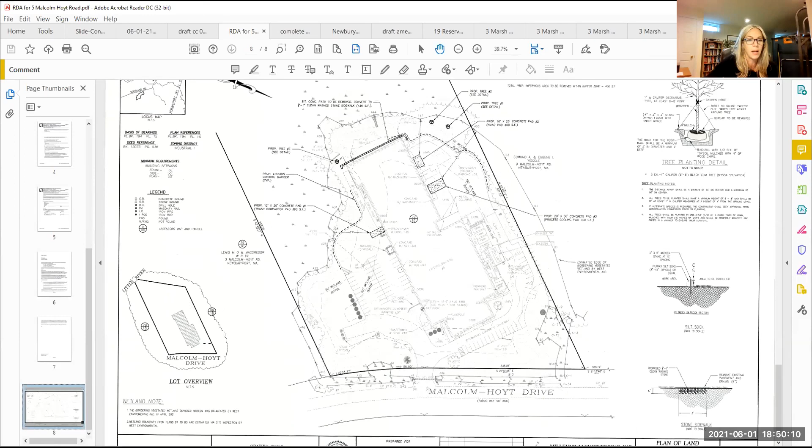Julie, I don't know how you want to do this, if you want to control the screen or if you want me to share my screen so I can pan around. Tell me where to zoom in. Tell me where you'd like me to go in the application, and I'm happy to have brought up the plan, and I will zoom in wherever you'd like.

Sure, okay. So the plan before you here is for the construction of 3 new concrete pads in areas that are subject to the Wetlands Protection Act as well as the Newburyport Wetlands Bylaw. The focus here is there's 2 on the right-hand side of the building as it's oriented in front of you now. One of them is located in the lawn area. Another is located further outside of the buffer - you can see the 100-foot buffer there. So that one is also in the lawn area, but outside of the buffer.

And then one additional one on the left-hand side of the building that is located entirely in a paved surface area. The engineers who were working on this provided a nice narrative describing what each pad was being used for, but essentially they're there to house additional equipment that would be placed on these pads. So once they are constructed and the equipment is placed, there'd be no further disturbance continuing from the ongoing use of them. However, there are impacts that will occur during the installation of those pads.

As a result, the engineers calculated the square footage of disturbance within the buffer zones, and as mitigation for that, they have proposed the installation of 3 native species tree plantings, as well as the removal of a concrete sidewalk along the top portion of the building, replacing it with a pervious gravel surface. It's a very basic plan, with the disturbances being mitigated through the reduction of impervious surface elsewhere within the buffer, and the minor impacts to lawn for that one pad within the buffer will be mitigated with the installation of the 3 new tree species on the site.

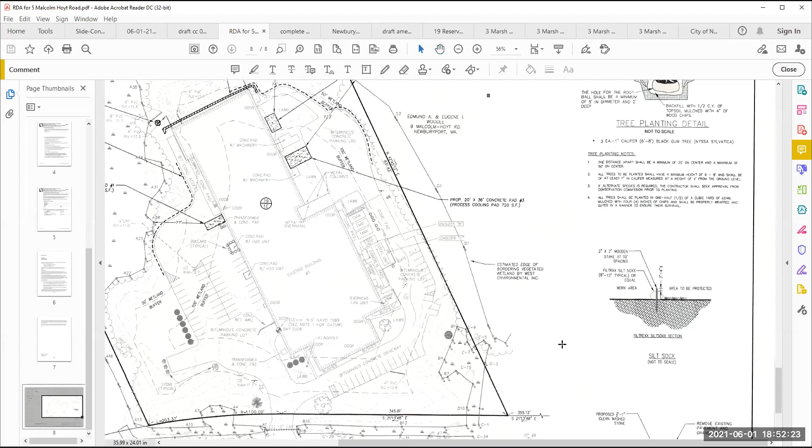We've proposed the use of Nyssa sylvatica as the tree in the corner of the plan. I believe there's a tree planting detail, and I'm not sure if they included an actual photo of the tree. We do have one we can provide the board, but it's one of the plants identified in accepted tree species lists for several municipalities, including Salisbury, Rowley, Amesbury, and I believe Newburyport, as acceptable outside of the wetland but within a wetland buffer environment.

Straightforward, I won't talk your ear off. If the commission has any questions, I'd be happy to answer them. Anybody? That looks pretty good. Straightforward, good to me.

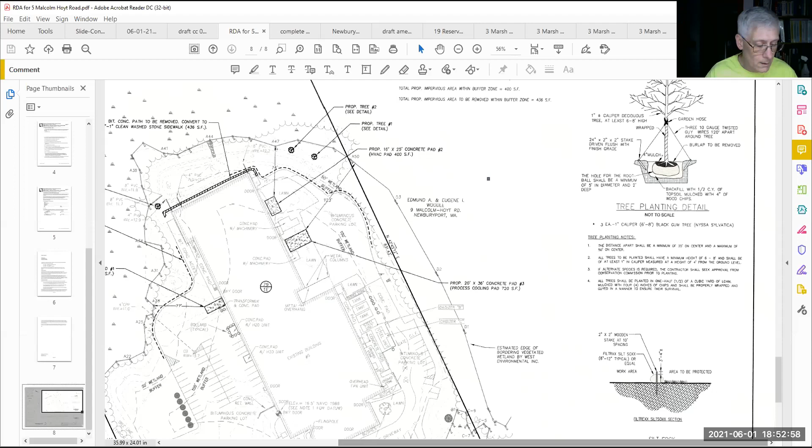Make a motion for a -3 determination. Second. The conditions being the trees and the impervious surface change. Okay, we have a second.

So roll call: Paul Healy, yes. Steve Moore, yes. David Vine, yes. Ron DeCola, yes. Carol Wagon, yes. I vote yes. All right, thank you. Thanks, Matt.

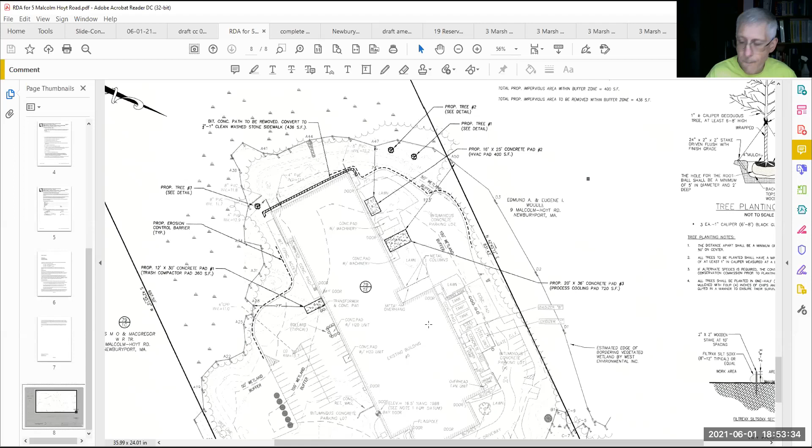All right, next item is Louisa Tanner and John Watkins, 260 Northern Boulevard, request for determination.

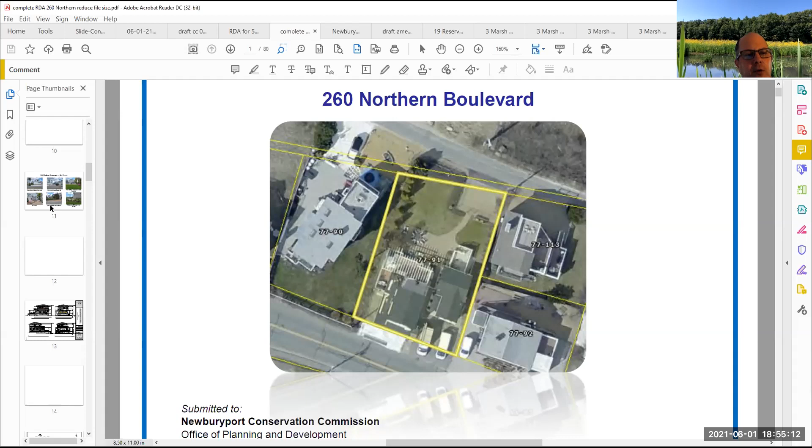Yeah, so it's mapped within the AO zone. We did, I think, provide the flood map and all that. So you can kind of see the site has some paved drive, a bunch of pavers, it's lawn. It's certainly the whole site is something you wouldn't allow today, but it's an existing structure, and actually there are 2 homes on the property.

What is proposed, on the house that you see there, is a large renovation, second floor on top of the first, and as part of that, reconfiguring the entryways, which is the only work really happening on the ground.

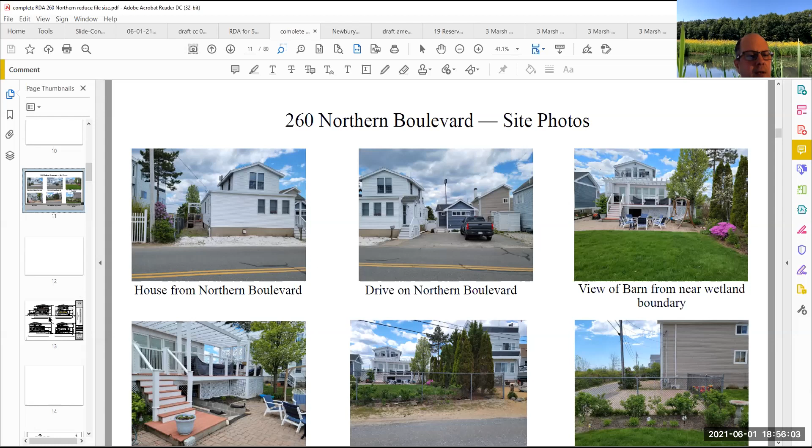Maybe go down to the site plan, or actually, if you go to those architectural elevation views. Yeah, so you can see the second floor gets expanded, and if you can see the deck in the upper left, that deck on the left-hand side that's tan, the area open underneath, basically that's a reconfigured entryway that's smaller than what's on the ground right now. And then in your upper right, you can see the entryway on the right-hand side. I believe that's the other area being redone.

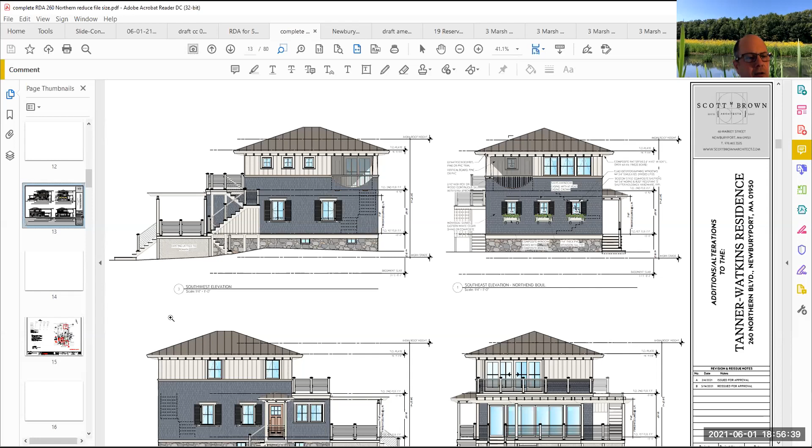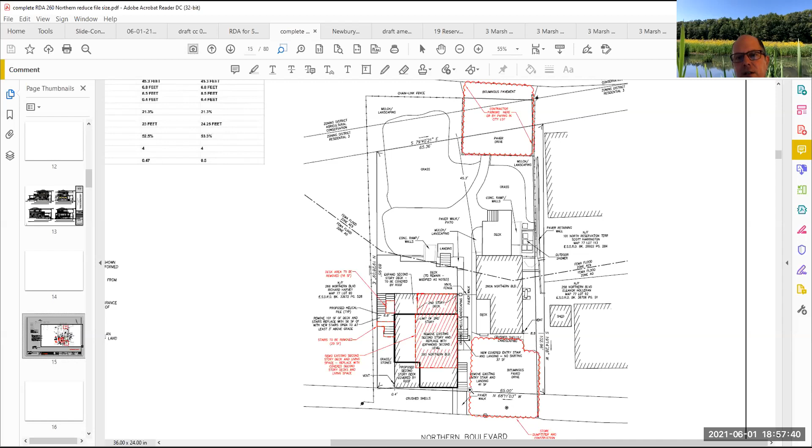Given the extent of the renovations, we also provided you with an extensive packet related to the substantial improvement rules. So I guess with that, I'd be happy to answer any questions. And if you want more information about the substantial improvement stuff, Olympia Bowker is here, who can address that package. She helped put that whole thing together.

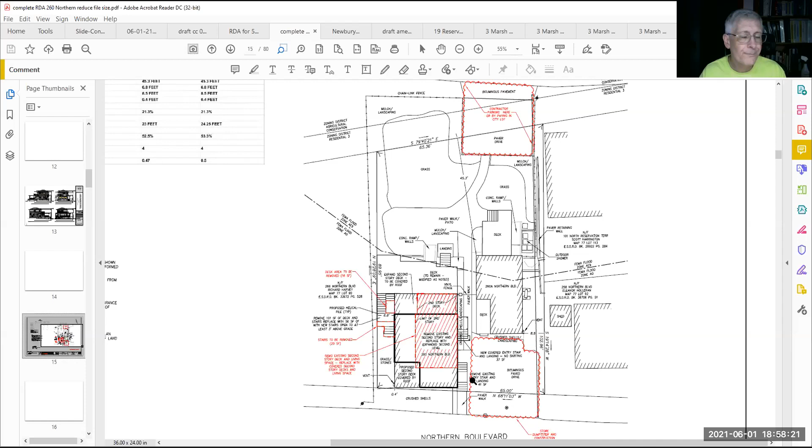Yeah, I'm gonna need more info on the substantial improvement part, because this seems like a rather substantial improvement to me. Yeah, it's a lot of work, and I think why don't we maybe have Olympia walk you through the package, which is after the RDA.

So if you can go down, right, so right there is where the package begins. And Olympia, do you want to kind of walk through the substantial improvement information?

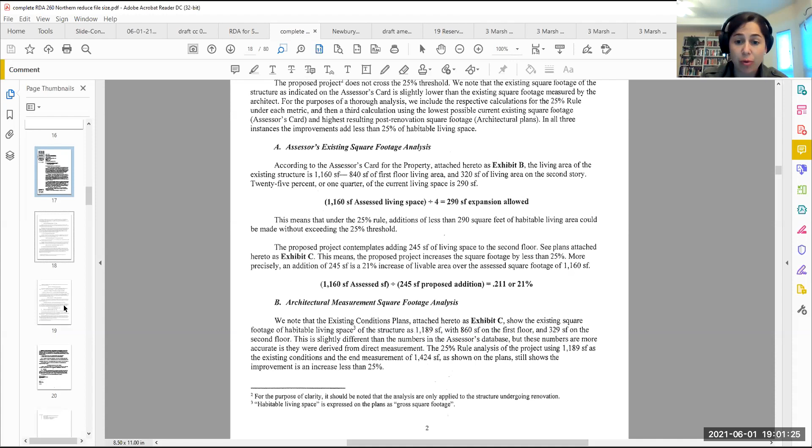What we have is a measured calculation of 1,189 existing square feet measured, divided by 4 gives us 297.25. So that would be the 25% increase allowed without violating that threshold. And again, only 245 square feet are being added.

Then we look to the second half of the substantial improvement analysis, which is the 50% rule. What the ordinance provides is that the term substantial improvement shall mean an improvement that increases the market value of the building by an amount equal to or greater than 50%. So there's two ways that an applicant can show this threshold is not exceeded. What we submitted is one of the provided forms of documentation under section 6B2A, I believe.

So what we provided is an assessment of the market value of the structure as is today. And then the appraiser looked at the proposed plans and calculated the market value of the structure once the renovations are completed. As you can see from the architecturals, the footprint is not expanding, it's just the second floor. And these additions, while they may seem like a lot, do not increase the existing value of the structure by 50%.

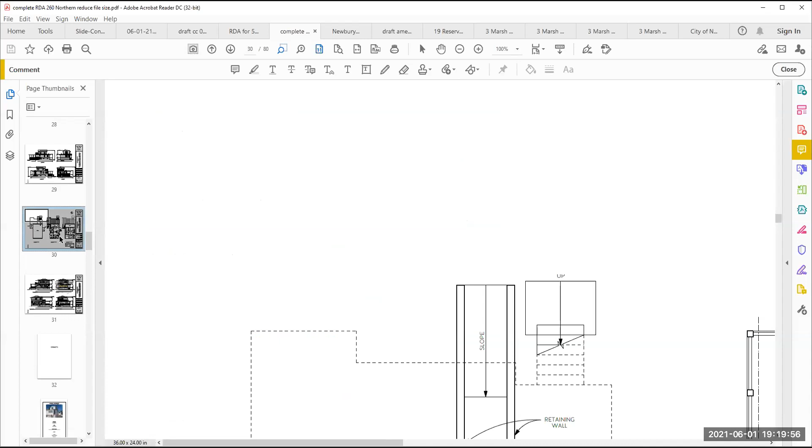The upstairs addition is basically a bathroom and a closet. We're both in our 60s, Jack's in his 70s. We have a spiral staircase and we wanted to remove that spiral staircase and add a different staircase in there so it's safer for all of us.

There is no bathroom there, and we need to go down the spiral staircase whenever we stay there. We're just trying to improve it. It's not any additional footage, and no outside area is going to be changed for conservation. It's basically just 240 feet on the second floor. That's it.

And we talk about the third bedroom. On the first floor we have a 1-bedroom, and all we were going to do is add a wall. We have 5 grandchildren, so we want to add a wall so the grandchildren could stay in one bedroom and the parents could stay in another. So basically it's really not adding another bedroom, it's just adding a wall.

And then changing the bathroom off the kitchen and putting it into the living room with the bathtub. We're big on family. We love our grandchildren, and we're just trying to make it a happy place for everybody to go to. We don't really quite understand the 25-50 rules, but we just want a nice place for our family to go to. We bought it as a family home, and at some point to retire in.

The rules we don't quite understand, because like we say, we're probably the only people on the island who own 2 properties. So I guess we just want to be able to add on 240 feet, so we have a bathroom upstairs, a safe way to go up and down the stairs, and a place for our grandchildren to come to.

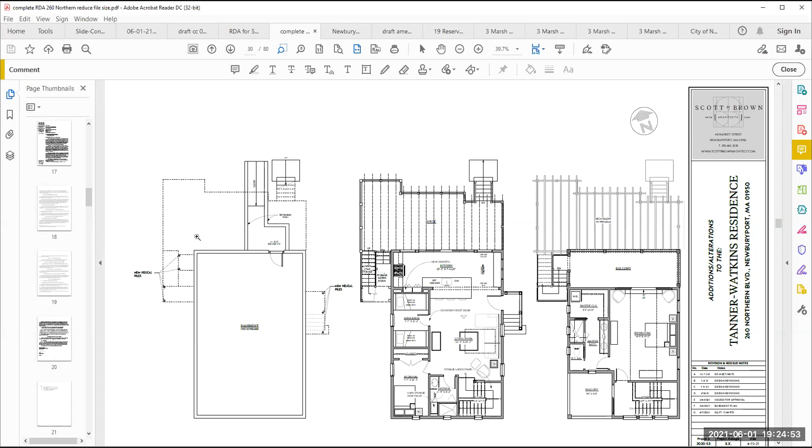Okay, so can I get a motion? Motion to continue to our next meeting, June 15th. Second. Roll call: Paul Healy, yes. Steve Moore, yes. David Vine, yes. Ron DeCola, yes. Carol Wagon, yes. And I vote yes. Dan is not here still, right? He's not. All right, thank you very much. Take care.

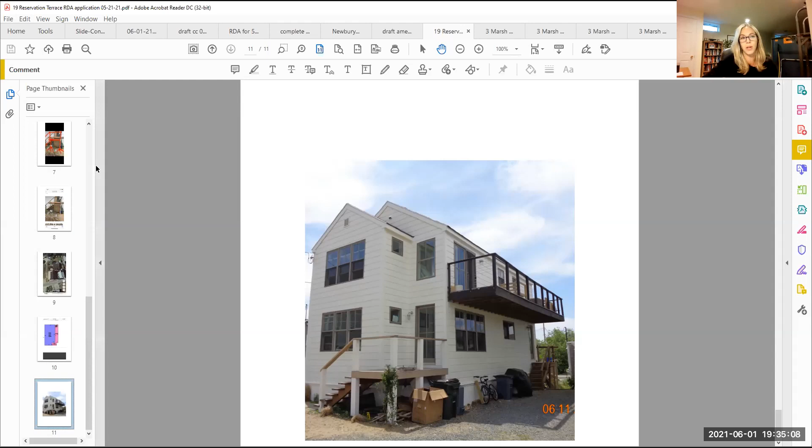So they talked to me about it and I said it is really minor. It's over an existing driveway area. There's not any impact to vegetation, but because the platform is getting larger by 3 feet in one direction, and because they're installing new piles here, I felt like it should have an RDA so that we could get the plans approved more officially, get it in a file, and have a secure approval that the work is getting done. So that's what this is.

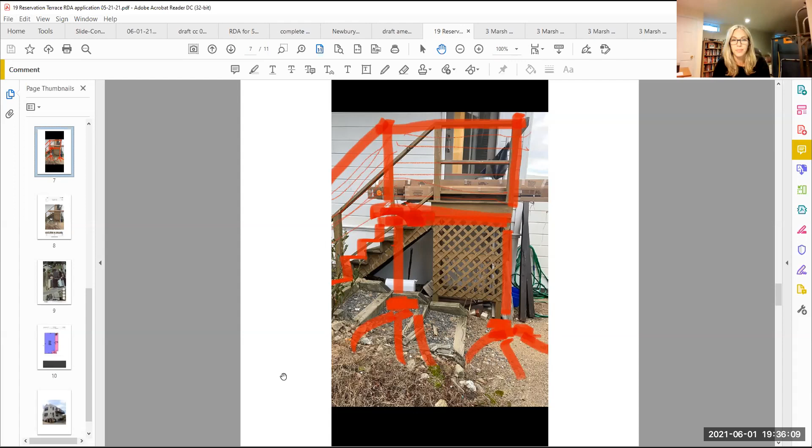Here's the existing exit from the back door. These are really rough. Essentially, it's going from 4x4 to 4x7. And this was their hand-done application. That's it, so no real mitigation necessary on this one. As you can see, that's it, it is what it is. No one's here to represent it.

Do you know what kind of pilings they're using? Yes, they're using the Plum Island approved diamond pier footings, which we've seen in the past. They kind of go down and shoot out, I think they're metal. Was that like the Diamond Pier helical one? Yeah, exactly.

Okay, so we were very specific. I spoke with them on the phone numerous times about all this, helping them get the application together and everything. And they totally understand the no concrete footings, but we can put that in as a special condition.

Right, yeah. I guess the part that bothers me is that there's no plan here, and I'm a little concerned how this gets communicated to the contractor and what the contractor is going to build. They actually have a building permit prepared with more detailed construction specs. He didn't include that in the RDA, but we do have that in the office, and the dimensions are on there, all those details are more clearly called out on those plans.

They're not really professional, high level engineered plans either, because again, this is just a pretty small carpentry job almost, but those specifications are there. And the person I was speaking with about this entire project is the contractor, not the homeowner, so the contractor is aware of all these details.

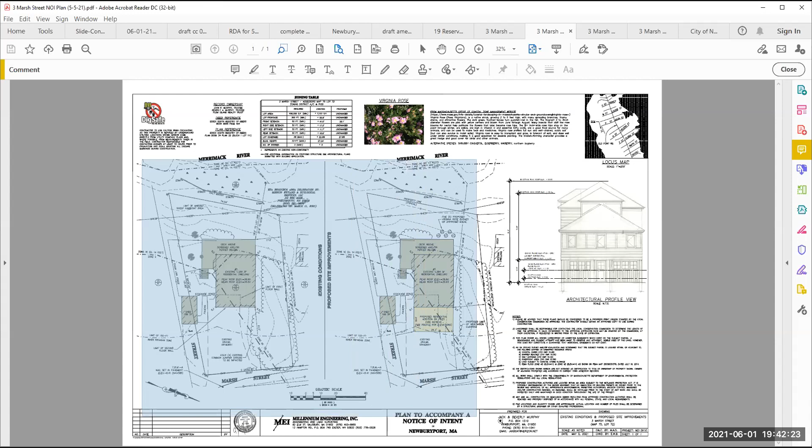On the left-hand side, we have the graphic depiction of those resource areas and the structure: existing shed, existing single-family home, the vegetation on the right-hand side of the structure running along the property line, and the gravel driveway coming in the front. On the river side, we've identified both the flood zones that cut through the building as well as the additional flood zones out further along the edge of the river itself.

What the applicant is proposing is to construct an addition elevated on piles on the street side of the existing structure. On the right-hand side in the lighter colored tan, that's approximately 16 feet deep by 26.3 feet wide. This addition is going to be on piles. It will connect to the existing structure and provide additional living space on that level.

It's a single-story addition to provide additional living space on that level for the owner who's getting a little older and can't quite go up the same number of stories to get up to the upper levels of the structure any longer. We provided a full notice of intent along with architectural renderings of the actual property of the home.

You can see one here on the right-hand side with elevations applied to show that the bottom of the underside of the addition will meet flood zone requirements.

There's very minimal disturbance. Again, most of this is in the existing gravel driveway with minimal piles. Only 3 additional piles are needed to come to the ground.

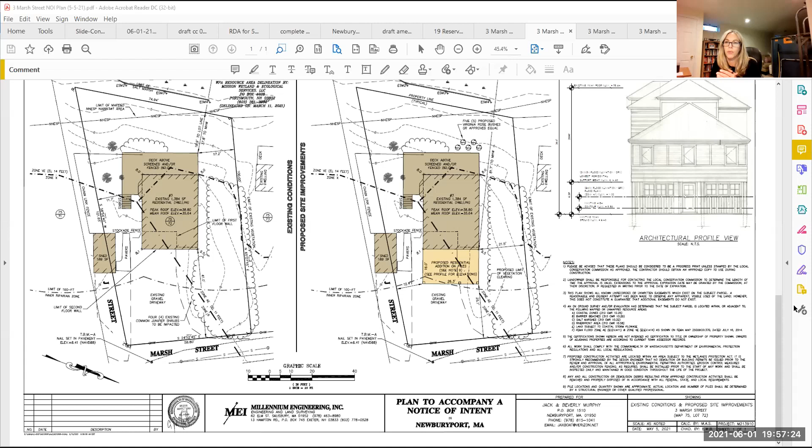So Matt, I can email you the form that we have. I think it's also on our website under forms and guidelines. But I can send you an email with the attached substantial improvement certification form that you guys can go through. Sure. When I get done here, I'll email you with the abutter notification forms and the legal ad for the file. And if you want, you can just reply back and attach it. Okay.

So the next meeting, is that enough time to get this put together? It's 2 weeks, right? June 15th. Yeah, I suspect we should be able to get it together by then, and yeah, we should be good for that.

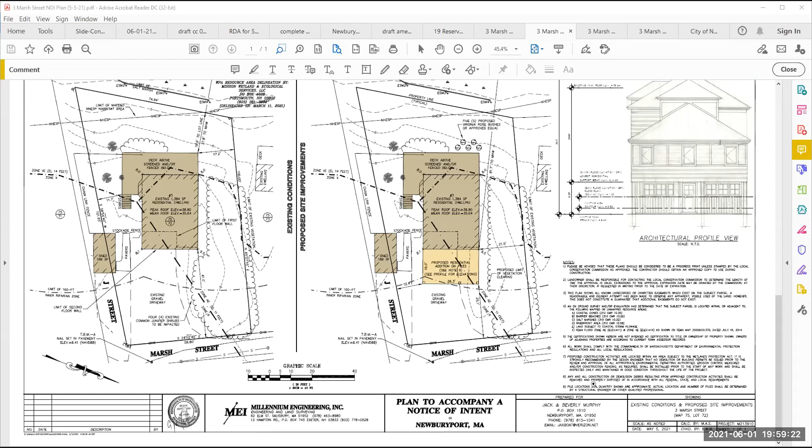All right. That's... thank you. All right, thank you, Matthew. Thank you.

All right, get a motion to close public hearings. So move. Say it, Ron, you're too late. Okay. All in favor? All right, aye.

All right, opposed? Okay. All right, next item is enforcement/violations regarding Gloria Braunhardt Trail.

I just have a question. Is Dan in the attendees? Is that Dan Warshall? I hope not. Well Dan, if it's you, raise your hand. No, he didn't get stuck in the attendees. Okay, yeah, just wanted to check that.

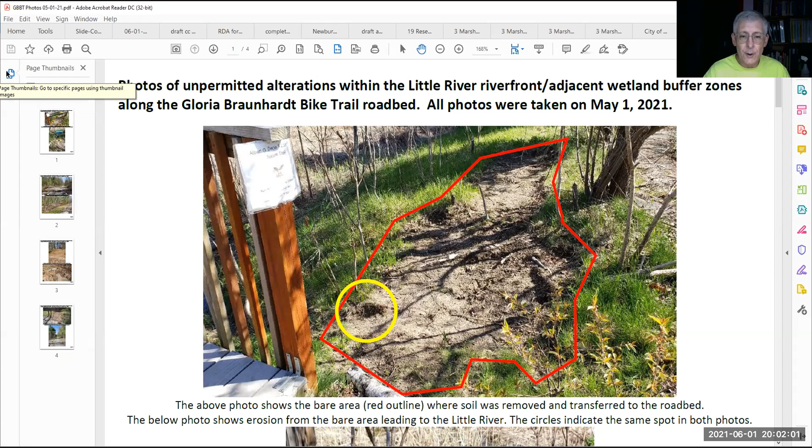So there's been a significant amount of damage done to areas both within the 25-foot and the 100-foot buffers. And there were no applications submitted for any of this work. And clearly there's erosion issues happening in this area and in some other areas, which needs to be taken care of or repaired.

And I think you need to fix the mess that's out there, Jerry. Happily do so. And this is going to need to be done in an expedited manner. This can't stay all summer.

We need to get this taken care of. And I don't particularly care if you organize the Boy Scouts to help you with that or get volunteers to help you with that, but it needs to be done. As far as I'm concerned, immediately. Devote the month of June for that.

Okay. Julia, can you show the pictures of the trees that were... oh yeah, these, not, yeah, that one. Jerry, we talked about those, I think it was almost 2 years ago, or at least over a year ago, about taking care of them and cutting the stumps down to ground level, and it hasn't happened. So I think that needs to happen too, fairly soon.

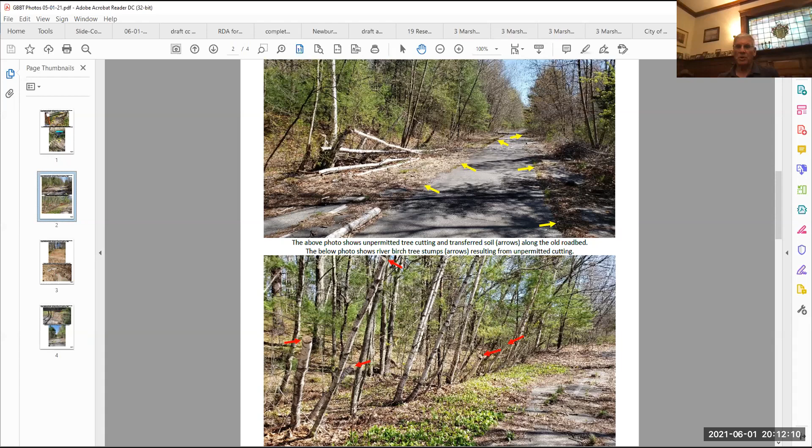So, all right, do we have anything else on this? Do we need to have some sort of a vote regarding by when it must be done? Not a bad idea, just to get it kind of confirmed as consensus and get it in the minutes. All right.

I'll make a motion that the cleanup of the Gloria Braunhardt bicycle trail will be finished by the end of June 2021. Second. Roll call: Paul Healy, you vote, Paul? Yes. Steve Moore, yes. David Vine, yes. Ron DeCola, yes. Carol Wagon, yes. And I vote yes.

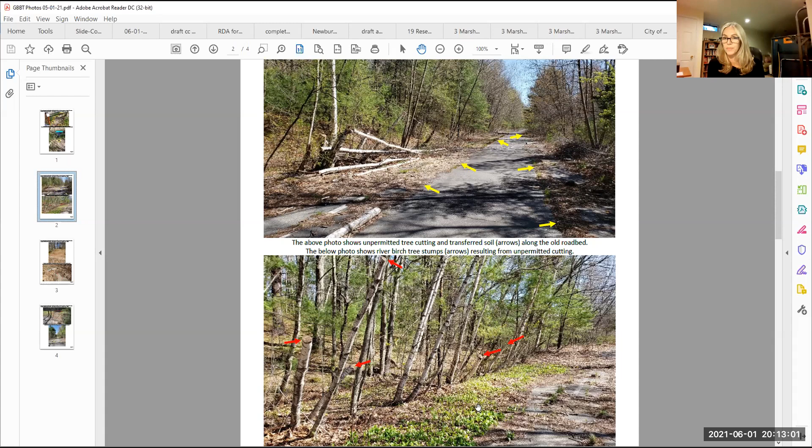Do we have anything else? I got two things, okay.

I'll keep them short. I think we ought to do what Tom suggested about the cumulative square footage in the regulations. I don't know, do we need a public hearing to do that? Yep, I agree with you completely. I'm glad you remembered that.

I forgot to say it at the time. I think we should definitely have a public hearing, and I think it requires some discussion because in a lot of ways it's a substantive change, and that's going to affect people.

I think we need to think about whether we want there to be like a time limit on that, so that if somebody moves in 10 years later and wants to put on an addition... The intent of that 25% rule in some ways is that if someone's going to increase their property size, that's a significant improvement. But if they buy it at one size and they're increasing it by a little bit, you have to think about how it's going to be received by homeowners out there.

Well, apparently in the V zone we already have that language. In some ways we do, in the V zone and the AO zone you're not allowed to increase the footprint by more than 20% cumulatively. And so we keep track of that over time.